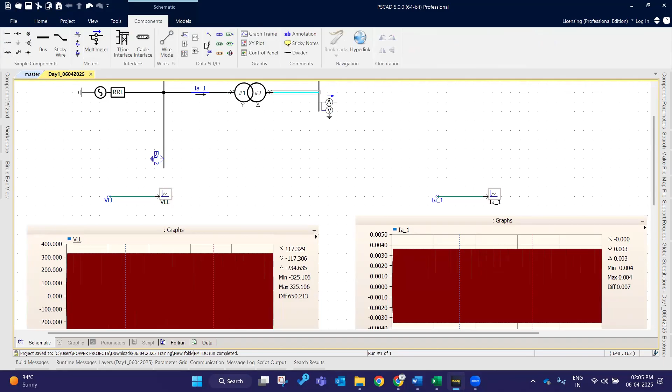So now we can start with the general equipment modeling procedures. In the components, there are many components. We will be using one by one when we go inside the simulation. If we discuss each and every element now, it will take a bit of time. So we can proceed with whatever we need, whenever we need the component part. At that time, I will explain, and at that time we can proceed with these components' explanation.

The models are nothing but, in case the name of the model will be present, the same as it is present inside the master library, in form of, say, a meter. If you know the name, meaning multimeter is there, you can place here. So instead of selecting from the components tab, you can select from the direct models itself. So source, if you are knowing the model source 3, you can select it.

So this is just a simplified components set, which can act as shortcuts for all the elements. From here also you can copy the components and paste them in our workspace. But for this, you want to know the component's name, element's name, at what name it is present inside the master library.

Like this, wind turbine, this - so everything will be present in the master library. So from the master library, how you are selecting and what is the name given to this - if you know the name, you can select the element directly here.

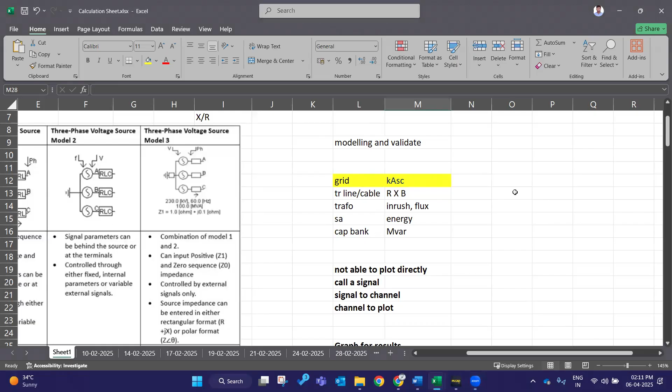This is another document. In this, there are various types of sources in PSCAD, not just one source. For that, we should do some calculations, and after that we will be matching. Before that, let me show the sources that are present in our PSCAD.

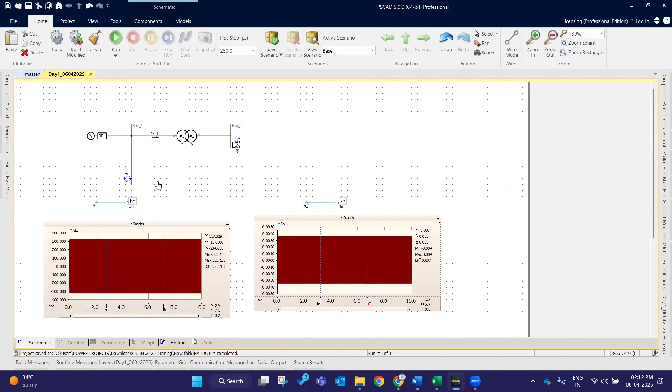There are still some basic options, but that will be resolved when we go with this modeling. See here, I have done some simulations - this is for basic understanding only. After completing the source, we will go with the transformer, transmission line or cable, and load, and we can perform a simple SMIB-like system simulation, and observe what things need to be checked.

Now let me open another case. We had already opened this in the morning itself. So how to open an already created case? If you have created some other cases already and want to open that case with the workspace, there are two things: one, you can directly pull from here and leave it to the software, and the other one is from the file, use this open option.

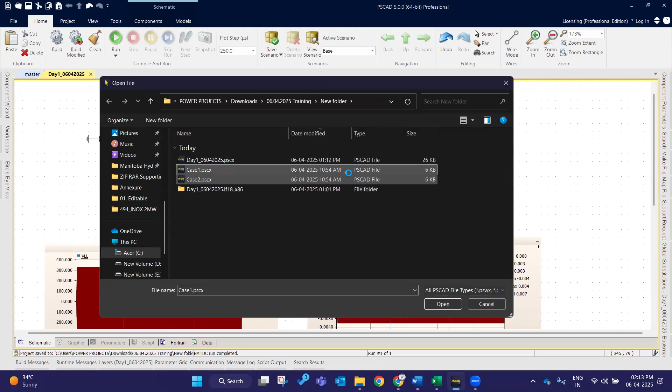So this case was created in the morning at 10:54 a.m., and I'm now opening it, in order to perform a new simulation I'm opening a new case file. Let me enable grid lines, usually it will be convenient for me. So now I want to model a source.

I want to model a source. So in the master library, go to the master library. From this case one, navigate to the master library, and upon selecting, there will be sources - second tab is sources. In this sources tab, our PSCAD says there are totally three number of source models available for AC.

So what is the difference between these three? It is quite similar only, all three are quite similar. Let me explain where it will be getting changed, let me show you. This is the sources tab. In this, this sources model number - if you just click on that, you will be observing three-phase voltage source model type 2.

This is model 2, and this is model 1, and this is model 3. It will not be arranged in order, but their corresponding characteristics will be given here - where it should be used, what parameters to be given as input, what should be taken as output. If you observe precisely, there are only three models, and from this model we can able to extract like this, depending upon the location where we are using our source.

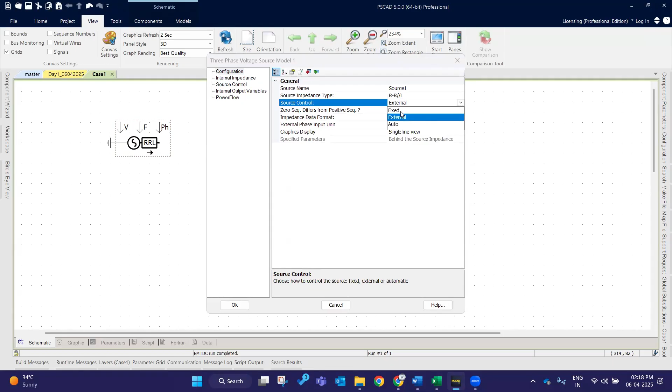For that, specialized tools are there. Let me show next - see, there are various types of sources: only R, source impedance type, R, L, R parallel with L, R series with R parallel with L. So now this configuration is selected, and now it is looking like this. After that, see source control - there are three things: fixed, external, auto. If I give fixed, see now my source, how it is looking - it is looking like this.

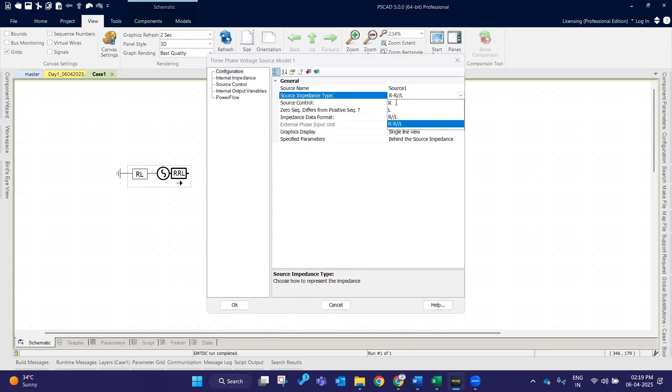So actually there is only one source model. Depending upon the nature, if I want to see how zero sequence differs from positive sequence, I am providing the ground. Now the model which is placed in the master library will appear like this. The same, if it is resistance alone, it will appear like this. See, zero sequence, yes, only resistance. Now check, so this model is shown here, right? So these three are the same.

Using this model itself, we can change the mode of the sources depending upon our requirement. The same for type 2 also. The middle one is type 1, right? This is type 2. If you go inside, it shows model 1, model 2, model 3. So now I have selected model 2. In model 2, the factor is only frequency and voltage alone are the factors to be controlled here. See the impedance, resistance, can be controlled here.

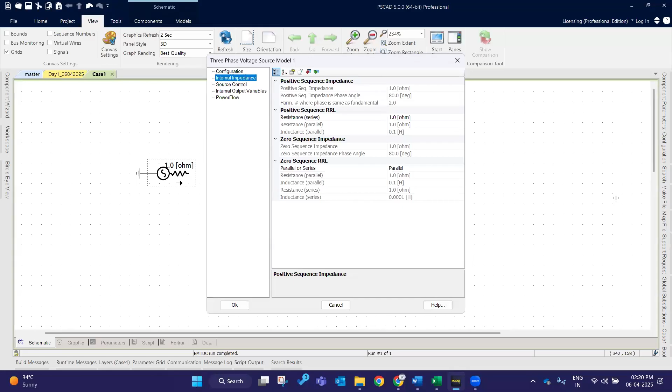Before that, I want to mention one thing. Resistance, internal impedance, see here, only positive sequence R, R-L, zero sequence impedance, zero sequence R-L. So depending upon the element you are selecting, that alone can be enabled here. But usually our impedance is R plus JX, right? So we cannot enter only R when parallel with RL. Sorry, R is series with R parallel with L. So only those configurations can be entered here. See here, R, L, R parallel with L, R series with R parallel with L. For these alone you can enter the impedance, not for the Z equal to R plus JX format, that we cannot enter.

Here also the same. See the configuration, resistive, RRLC, RLC. So if you are selecting, depending upon that, this factor will change, RLC. The mode which we are selecting, for that our source will act. Clear? Usually these two types of sources we won't use. Instead, we will always use, even in real-time case studies also,

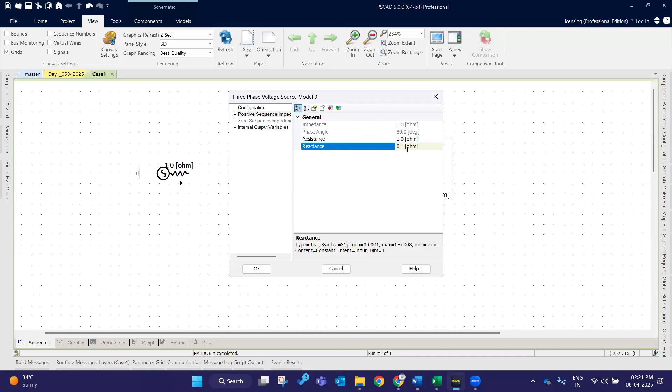we will be using this type 3 only. What is the specialized feature in type 3? Without being like type 1 and type 2, model 1 and model 2, here upon going inside you can enter the positive sequence impedance, resistance and reactance, even in rectangular form or polar form, you can enter in both forms here. The same for zero sequence. Zero sequence here differs from positive. Yes, see here. So this is the specialized feature making us use this model 3 source under every case.

Clear? So now let me clear these two. Just delete. So this source I'm going to use. Before that, one comparison is there, let me show you. So three-phase view also there. This is actually single-phase view. See here, graphics displays there, no? If I select a three-phase view, for each and every phase we can connect the same source. So now let me give a single line. Let us see the comparison first.

So these are different representations. So distinct features, if you want to check, this is model 1, model 2, model 3. Can input zero sequence impedance, automatic voltage and power control. Signal parameters can be behind the source or at the terminals, controlled through either fixed internal parameters or variable external signals. Whereas model 2 is signal parameters can be behind the source or at the terminals, controlled through the same only.

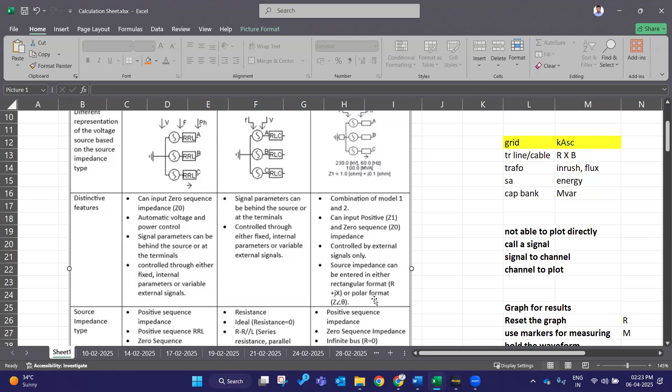When coming to model 3, it is the combination of model 1 and 2. Model 1 and 2 can input positive and zero sequence impedance, controlled by external signals only. Source impedance can be entered in rectangular or polar form, in other sources it cannot be entered. Here it is positive sequence impedance alone, RRL, zero sequence impedance alone, RRL, or else just R, L. So individual elements capability only in these sources you can enter.

But here, even if it is an infinite bus also, we can enter the positive and zero sequence impedance here. Clear? Here the external controls, as I mentioned before, type 1, voltage, frequency and phase angle can be controlled. Type 2, voltage and frequency alone can be controlled. Whereas in type 3 only, voltage and phase angle can be controlled. Clear? So this comparison, let me paste in our sheet for your reference.

Or else another thing, source alone, let me create a separate sheet.

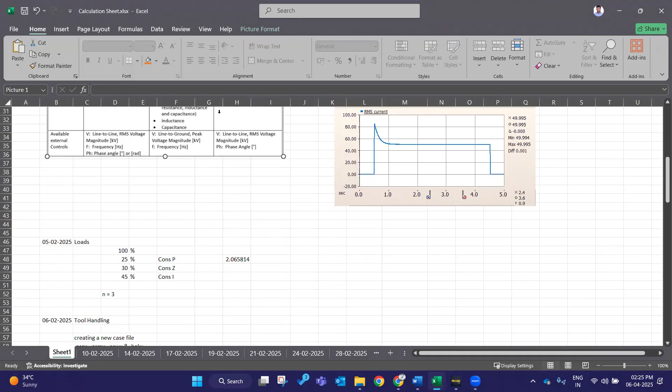So this tab is for completely source modeling. I will upload this book also. Clear? So other than this won't hold any data, right? This one we are going to see the calculations, everything. This is loads. Okay, let me close this.

So yes, now the source model is selected. Now we want to model this in detail, right? So for modeling this in detail, let me choose some parameters - grid parameters.

Actually, I'm taking this data from a real-time project. If you're having data, you can try by yourself. Upon taking a real-time project, I'm in a situation that I cannot present everything. So I will just mention the values, right?

So first one is voltage. Usually voltage means line to line only. Then frequency. Then three-phase short circuit current. Then single-phase short circuit current. Then X by R three-phase, X by R ratio three-phase. Then for single-phase also, there will be different X by R. More, in rare cases only, it will be similar.

So voltages, it is actually a 230 kV system and my frequency is 50. In here, my both the short circuit current, single phase and three phase, are the same. The X by R ratio for three phase is 72.82, whereas for single phase is 54.93. Clear? So this is kV.

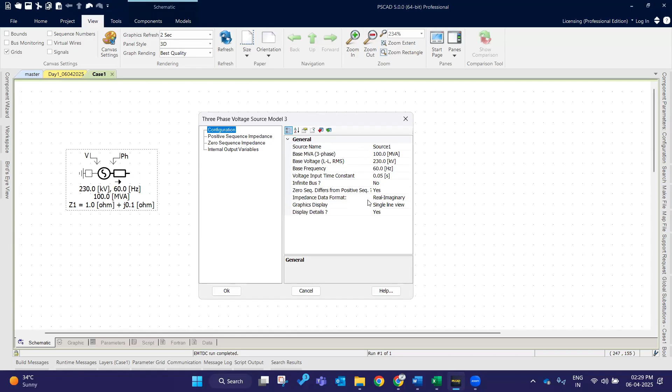Clear? So now let me explore this source. I hope you understand why we are going with model number 3. Why? Because it only permits the entering of positive and zero sequence impedance.

So first the source name. My source name, let it be by default source one. So base MVA, usually it will be 100 only. So let this value also be stored automatically. Base voltage for ours is 230 kV.

Yes, here also 230 kV. Then base frequency is 50 Hertz for us. Then voltage input time constant.

This voltage input time constant means how my source is getting started from the source. For example, when you're starting the simulation, at 0.05 seconds, my source will start to generate voltage. But if you want my source to generate at the first second, even though turning on the source, it should generate voltage at the first second, you can enter here as 1. Actually, this is the default value. We won't change anything; in case if your requirement needs it, you can enter it.

So here infinite bus, upon selecting the option for infinite bus means it will be acting like an ideal source, where see, this positive and zero sequence gets automatically disabled here, right? Upon selecting no, it is getting enabled here. So this is for simulating the infinite bus option.

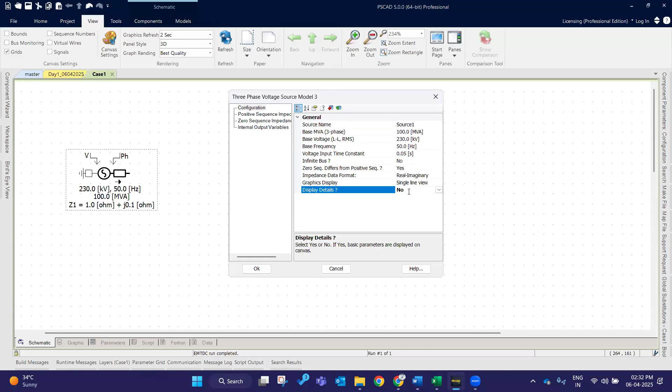Then display details. This display details option is customized and will be available for only very few elements in PSCAD. Other than that, this option won't be enabled for all elements. Now let me select no here, see how it gets changed. All the display got disappeared. If I want the details, I just enable it here, display details, now it will display.

The positive sequence alone will get displayed. Even if you enter zero sequence also, it will display only positive sequence: KV, Hertz, MVA, and the sequence. So this is the first tab what you should configure.

In the second tab, see here, positive sequence impedance, resistance and reactance in terms of ohm, because we selected real and imaginary. The same for zero sequence also, resistance and reactance in terms of ohm, the same real and imaginary we selected.

Then internal output variables is nothing but for defining signals. If you want to measure the output power, you can define the signal here. From the signal, you can follow the previous session's process: signal, defining signal, calling channel, simulating, and taking the results. Like this, for entering the output variables alone, there is a separate tab. Usually all the elements will have the same feature, for taking the output, entering the output parameters alone, there will be a separate tab.

So, hope how to configure this is clear. We haven't entered the values yet, up to now, I just explained this model. Similarly, for whatever model you are using in PSCAD, all the elements will be having, as I mentioned before, two halves, left half and right half.

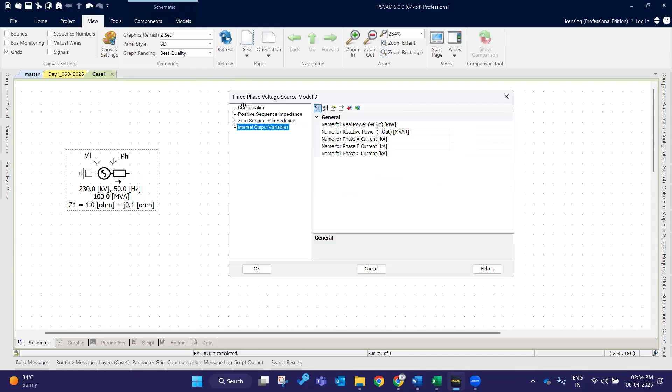So is there any doubt? Shall we proceed with the data, do the calculation, and model the source? Yes. Okay, so up to now, this is the data what we have got from the client.

So after that, we want to calculate the MVA, short circuit MVA. Why? Because after calculating the MVA only, we can able to calculate the positive sequence and zero sequence impedance. For PSCAD functioning, positive and zero sequence alone is enough, negative sequence is not required.

So automation will automatically be considering that. Negative sequence means what, whether the positive and negative sequence, whether it is going to change, it is not going to change actually. Only the sign of the value will be getting changed due to clockwise and anti-clockwise. So here, entering the positive and zero sequence alone is enough.

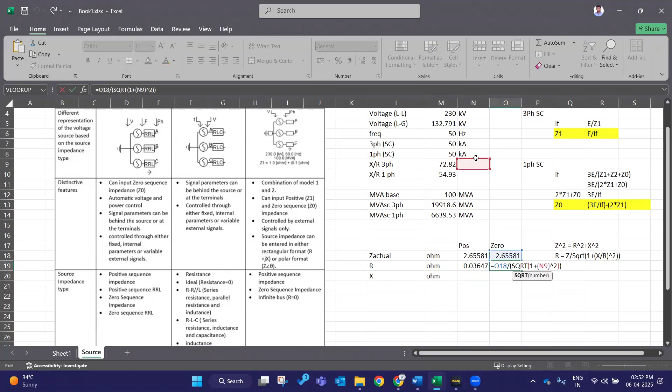But in this case, sorry, for instead of zero sequence, the procedure is the same. But what we will be using is X by R for single phase, right? The remaining, the Z naught will be the same, right? Why? Because in this case, it is Z1. When coming to zero sequence, it will be Z naught.

Then for X, the same formula we can use, the above formula, Z square equal to R square plus X square. So from that, if I want X square means, yeah sorry, X means equal to square root of X means in terms of positive, Z square minus R square.

Clear? The same for zero sequence also, Z square minus R square. So here the value is looking quite similar. Why? Because in our terms, it is both the three phase and single phase are the same, right? So this formula also we are using. So now what are the values that we can able to enter in our PSCAD, these two only.

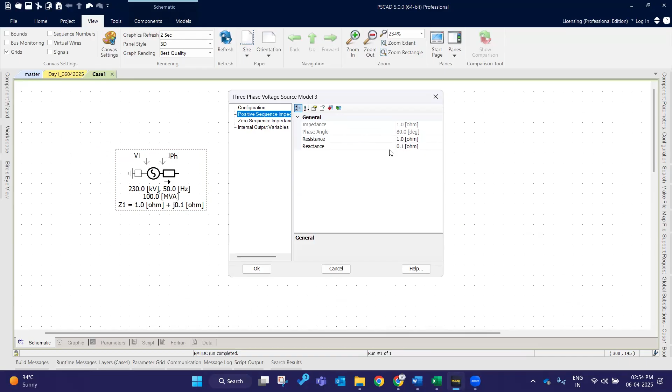This R and X values alone we can able to enter here. Let me show how to enter that. So just go inside our source. Already everything is modified here, right? Base frequency, everything. So positive sequence impedance, let me go to positive sequence impedance, resistance, and reactance. So positive sequence resistance is 0.03647.

Just copy, right? And just copy and paste here. Control C, Control V. The same for reactance. Control C, Control V. So this is for positive sequence. And for my zero sequence, you should calculate this. Sorry, you should enter this.

In terms of ohm only, we are entering. If you know, I want in a polar form only, magnitude and angle only I'm going to enter means, surely you can enter. So before that, you want to do one thing. In the configuration, you want to change here. The impedance data format, no? You want to change as magnitude and angle. Clear? So now entered all the values, just press OK.

So now values will be appearing like this. Usually positive sequence alone will be shown in detail. Zero sequence won't be observed outside this source. Clear? So now we have modeled the source, right? We have modeled the source. What we should do is we should validate, as I mentioned, no?

So elements, everything we are modeling, we should validate it. Validation means, they are mentioning that three-phase short circuit is 50 kiloampere and single phase short circuit is also 50 kiloampere. So for the same grid, I'm going to inject a three-phase fault and a single phase fault.

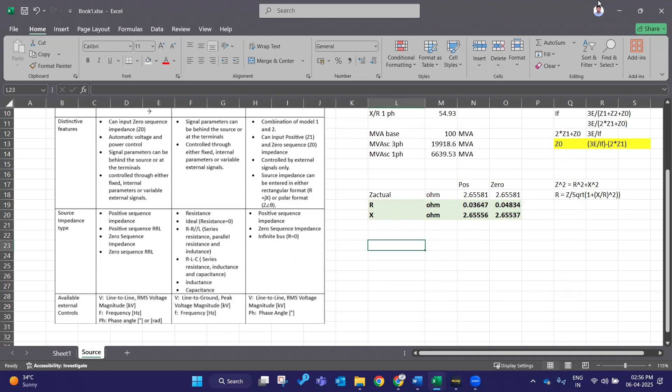So this third type of source, see here, this voltage and phase angle is remaining open. It should not be like this. So in order to provide value to these inputs, there is a specialized option called, in the components tab, data input or output, this channel like integer constant will appear here. Using this, you can place it, just rotate and place here. And similarly another one, rotate and place here. By default it will be holding the value of 1.

So now whatever voltage value you enter here, that alone will be considered by our PSCAD. Even if you enter 230 kV inside this value, so if you enter 230, this 230 will be considered. For example, if you enter 400, 400 kV will be considered. So in this we will be able to change the voltage.

So let me give 230. Phase angle, let me assume there is no phase difference, so let phase angle be 0. Let the phase angle be 0. So after this, this is the complete model of modeling a source. So now our modeling of source is completed.

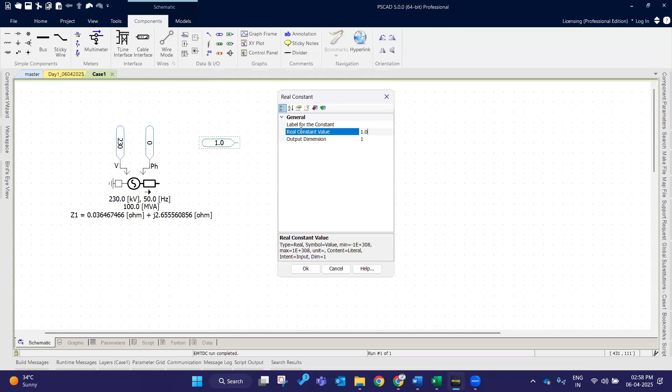Clear? So after that, I will be connecting the source to one bus. Let me rotate - by default it will be in horizontal position, so you should make it vertical by rotating. Let me connect this source with the bus using wire mode. Clear? So now I want to measure everything - voltage and current. Let me use the multimeter in this bus.

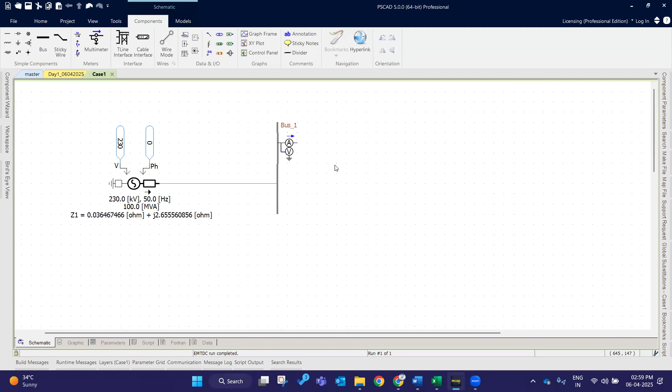So after that, everything is ready. Now what we are going to perform? Three-phase fault and single-phase fault we want to perform, right? So for that, a separate component is there in our master library. Let me go to master library.

See, fifth block, breakers and faults is there now. Breakers and faults, so go inside this. See here, there are various components. So as of now, let me pick this alone - timed fault logic is there now. So you should just copy, Control C, select this timed fault logic. Actually, let me copy and paste and explain.

See, actually it is looking like a single component, but itself it is two components. This is a separate component, and this is a separate component. This timed fault logic is separate, whereas this three-phase fault component is separate. But this will work along with this timed fault logic only. So using this component in our PSCAD, we can generate the faults. Let me connect this with our bus bar. Clear?

So how to configure this now? We have just copied and selected here. How to make it as a three-phase - so first, before that, for two components I mentioned. So first let us explore component one. On the left-hand side, there are totally 5. On the right-hand side, let us see the characteristics parameter. Configuration, we are not going to change anything here, because fault resistance by default will be a smaller value only. Fault type.

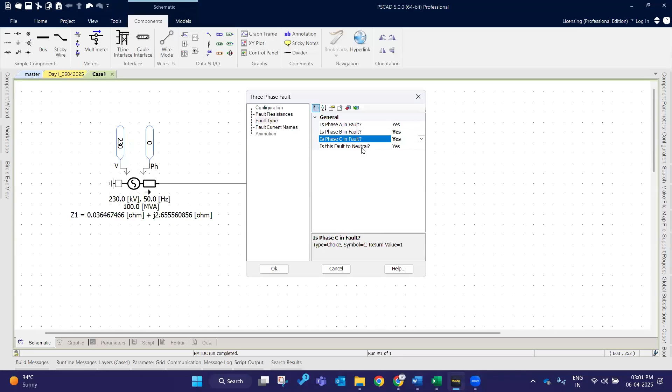Is the fault to neutral? No, why? Because it's a three-phase fault. Now see that A to G has changed to ABC, which means three-phase fault. So now this component will exhibit the three-phase fault to this bus.

So this timed fault logic, what will it do? At what time should I apply the fault and at what duration should my fault get cleared? Let me apply my fault at 1.5 seconds and my duration of fault is 2 seconds. So it will apply the fault at 1.5 seconds for a duration of 2 seconds, after which you can assume the fault got cleared.

Okay, so now let me run and check whether the simulation is converging or not. Sorry, for this we want to use the build option. I directly performed the run. Yes, it is running. Yes, my simulation completed actually.

But we haven't mentioned or defined the signal, or called the signal, or any channel or plot, so we haven't captured anything. Now it is holding the value but we cannot display it. So before running, we want to place the corresponding signals, channels, graphs, everything. So up to now, is there any doubt?

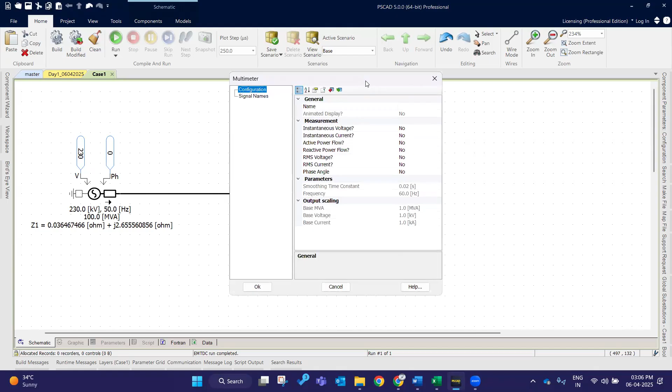Right, so now after modeling this, we want to define signals and we want to measure. So let me use this multimeter. What are the things I want to measure? A voltage I want to measure, of course yes. Then current, RMS current here we are going to measure, because the values we are measuring are RMS. If needed you can measure RMS voltage also, but it's not required. RMS current alone is enough for us.

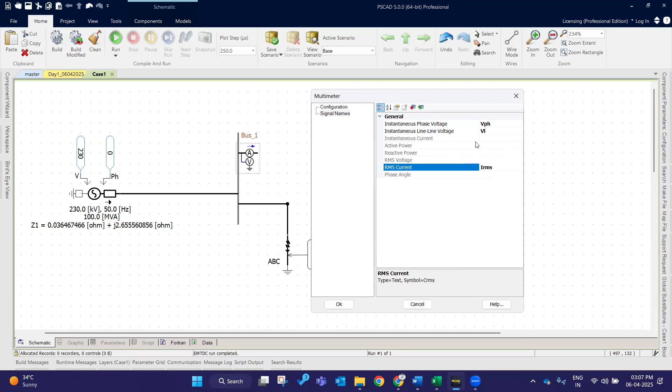In this, select digital always, because analog means there will be some disturbances. Upon enabling, select digital, there will be a drop down here. Select digital, instantaneous voltage, now specify the signal name, instantaneous phase voltage. I don't need line to line. Okay, we can select both the voltages, V phase, V line, so both of them I'm selecting. Then instantaneous current, that is not required for us, so IRMS, let me give the name IRMS. V phase, VL, IRMS, three signals I have defined.

So from the components tab, using this component, in the previous session itself I have mentioned, right? Three signals we want to measure, V phase, phase voltage, and V line. These are case sensitive, so usually copy and paste. After that, use the channels.

Yes, then using the wire mode, now we can able to observe the bus phase voltage, bus line voltage, and the RMS current.

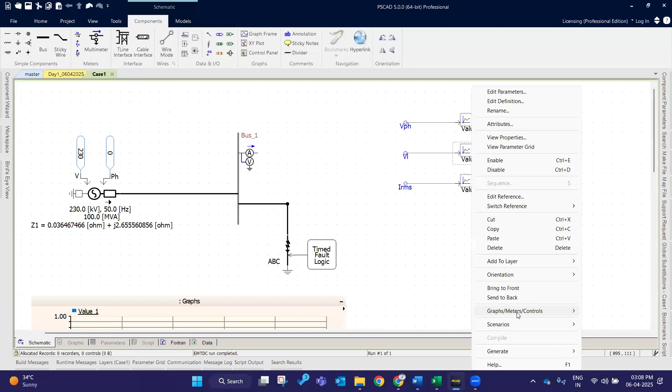Right before that, I want to pick the graph. So in the channel option, right click on that. Using these graphs, meters, and control, add overlay graph with signal option.

So now my workspace has got a little bit congested, right? Upon plotting three graphs, it is looking congested. So at that time, go to view, size, you can increase the size. This is the case I mentioned where you can change the canvas settings whenever you need.

Now our simulation space got bigger. Now let me run the simulation. Yes, it is performing. Yes, run completed.

So run, let me check. Run completed. Let me reset first. First of all, I should reset. Yes, it is not appearing. Let me show you why.

So before that, this build messages is another important thing, where you can observe the warnings, messages, errors, right? Only in this build messages alone. Runtime messages is another option, but runtime messages will show the errors which cannot be displayed by the build messages. Only runtime error, build messages can display the error messages.

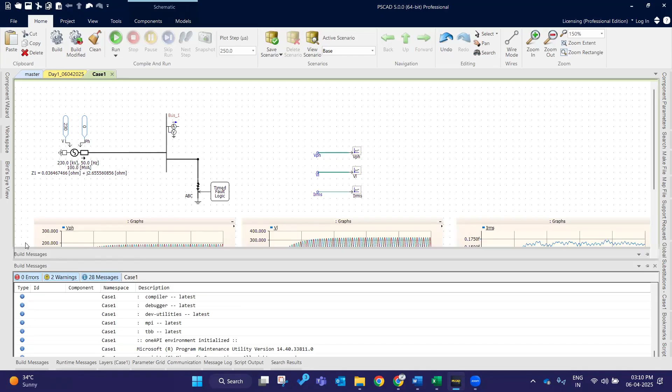So as of now, zero errors in my system, so now my system is perfectly working. Then warnings we can omit.

And the messages is nothing but the beginning of the compiling, so started compiling, executing, sentences like that only. So error only we should mainly focus. Here they are giving the provisions for selecting the error alone.

If you want to check the warnings alone, you can select that, disabling these two. Or if I want to check the messages alone, you can check that. Usually you should check the errors alone. What are the errors? Warnings and messages, no need. Clear? So now my system is clear.

But I haven't got any responses right here. See, so what should I do? First, check with the fault duration.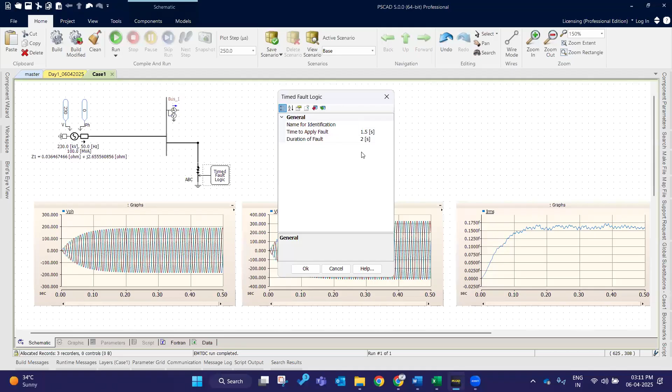So I'm applying my fault at 1.5. My duration of fault is 2. So totally 1.5 plus 2 is 3.5. So at least I should run my simulation for 5 seconds.

But let me check with the project duration. See the duration, it is in default setting, it is 0.5 seconds. So let me increase the duration of run up to 5 seconds. I hope you understood what mistake we have done.

Sorry, what mistake I done. So actually total running time it is set as duration 0.5, whereas I'm simulating the fault at my 1.5 second only. But PSCAD will run for this 0.5 second. What are the parameters you are giving in duration of run, for that second only it will run. Beyond that, it won't converge. So that's why the fault is not occurring.

So now I have changed it to 5 and now running the simulation. Now surely it will run. Yes, now it is completed. Now let me reset.

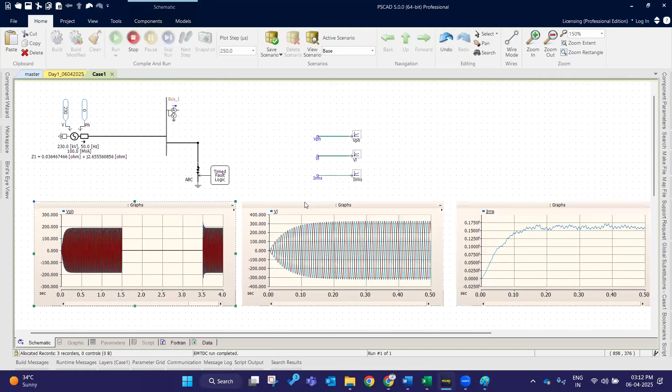Yes, hope it is visible, right? So at my 1.5 seconds, I'm injecting the fault. Three-phase fault I'm injecting, so all my three phases are lying at zero. This is phase voltage and this is my line voltage.

See here, this also during the fault, all my three phase voltages are at zero. Then after the fault, it is coming back to its normal. Clear. So see my IRMS.

IRMS, what should I measure? Actually, I should measure 50 kiloampere. Why? Because I'm injecting a three-phase fault, so totally 50 kiloampere I should measure, because short circuit kiloampere is 50 for me.

But here, before that, let me measure these two. First reset, after that measuring. So measure after the post fault. It is 187. And here also measure, it is 325. And if you are measuring here, it is quite low.

Why? Let me check. So before that, if you want to give units, click inside this channel. There is an option called unit here. You need not configure anything here, just give kV, and it will show kV here. Similarly for here also. So upon giving like this, our graph will appear like kV.

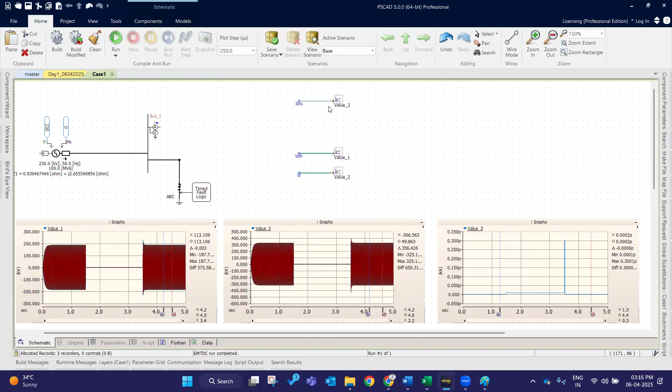So this will permit you to give the instantaneous value only, but all I need is the RMS value, so instantaneous value I don't need. For plotting the RMS value, there is a way to derive this - it is actually containing the three phase value, right? Instantaneous means containing all three phases' values. So from this, I want to separate the single phase value using this wire mode and extend this.

There is an option in the components tab itself - see, array tab, that one option is there. It is appearing like a pin-like structure. This is called array tab. What this array tab will do is classify - in case there is a three-phase signal, upon entering the number here, it will classify the R phase signal alone. For that, after that, we want to use some RMS block.

So for the RMS block, go to master library. In this, there's a meters option - 13th option, meter will be there. Go inside, so there will be a meter called a single phase RMS meter. Let me copy this, copy and paste and connect here.

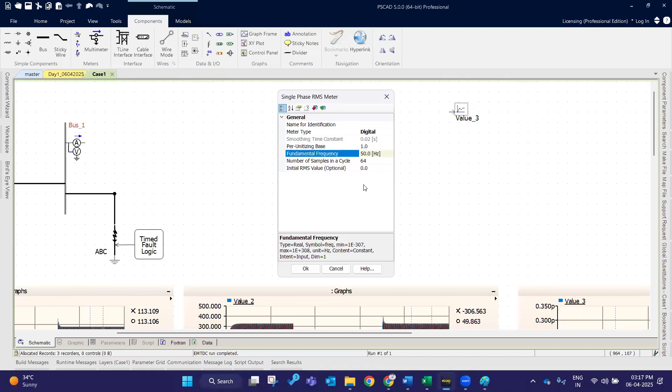So now in array tab you need not configure anything, just go inside the RMS. I will always suggest the meter to monitor as a digital one, because that will provide a precise value. Our fundamental frequency is 50, so the only thing to be configured is meter type digital, fundamental frequency 50.

Right now, place this graph value. Now perform the simulation. Let me wait for the simulation to converge. Let me reset.

Yes, it is not showing. Or else let me check the 1.52 - remaining everything is correct. Three phase fault only, we are injecting. Let me check for single phase fault - it must show response now.

Digital 50 only. Just give me a second. So it is refreshing - so here it is single phase fault. Okay, or else, yes, yes, I understand.

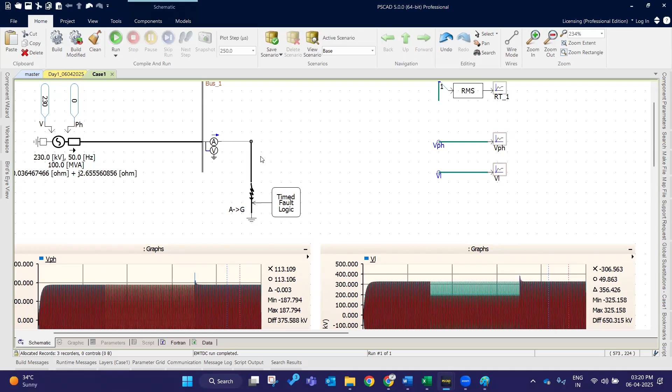Yes, we want to plot the multimeter in - sorry, this is the mistake. Yes, now let me check. Yes, now it is, we are getting it.

So see here. Now, okay, let me come with the three phase fault itself. Now let me run the three phase fault. What I should observe is - I think the system is getting slow here. So for three phase fault I'm injecting, I should observe 50 kiloampere RMS, right?

So now it is running and completed. Let us check R. Yes. Now check after reaching the steady state after the fault - it is similar, right? 50.001 kiloampere.

So in case if you are feeling that this graph is appearing very light, in this option you can select the name of the graph. There will be A - A means at what value currently it is showing. So if this value 2 is selected, corresponding to 2 means R, Y, B - so Y's value is showing here. And if you select 1, R value is showing here. Then V means visibility - if you disable all these three, none of the graphs will be visible. So this is R phase, this is Y, and this is B.

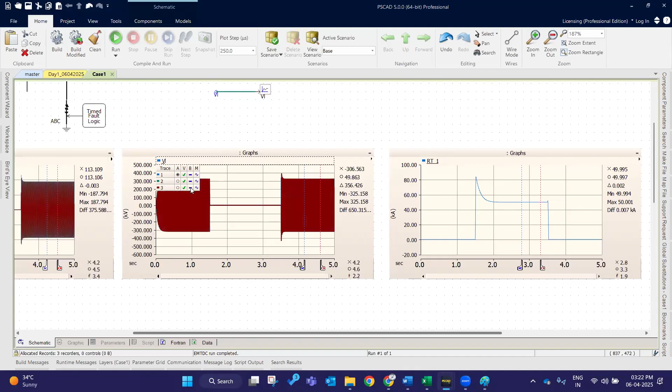Individually you can make them visible, or else cumulatively you can view them. Then B means making it bold - bold means it can appear a little bit thicker than the previous case. Then M means in case if we are applying any stepwise waveforms other than sine, that stepwise waveform can be viewed in detail using M.

So here, let me make it bold. Here it is having all three signals, right - R, Y, B. Whereas here I am measuring only my RMS alone, so R phase RMS alone. Now let me make it thicker - see, 50.001 kiloampere it is showing.

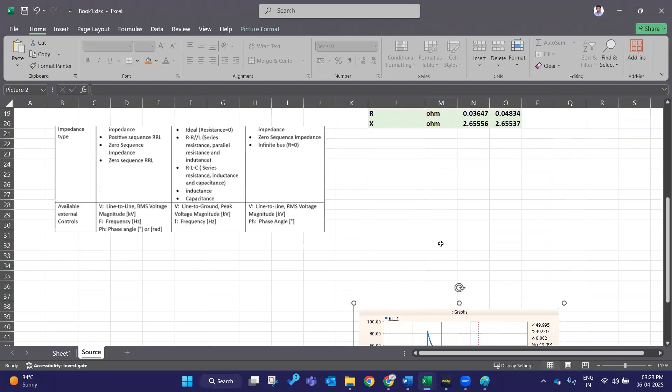So how to copy this graph and paste it - just click on the graph, right click, copy frame will be there. So copy frame and you can paste it in your workspace or in your Excel sheet workbook, whatever you are performing. And this calculation, let me paste here.

So 50 kiloampere I am observing, and the remaining two also I want to capture now. Control C, Control V. Direct Control C and Control V also will work here. 325, I'm getting 325. Then for phase, I'm measuring.

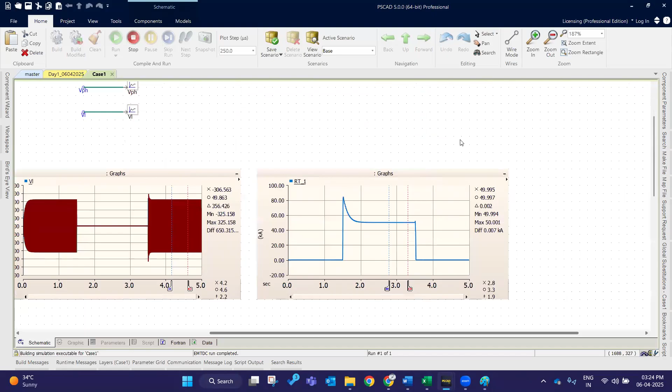Yes, after, see, now it is visible, right? Only one phase alone got faulted here, that is R phase alone. You can view this in detail. See, the blue one is R, the red and green is Y and B, whereas the blue is in zero after the fault. So it is single phase. Here also, now my value is clear.

This is for three phase, this is for single phase. So now these two are got validated.

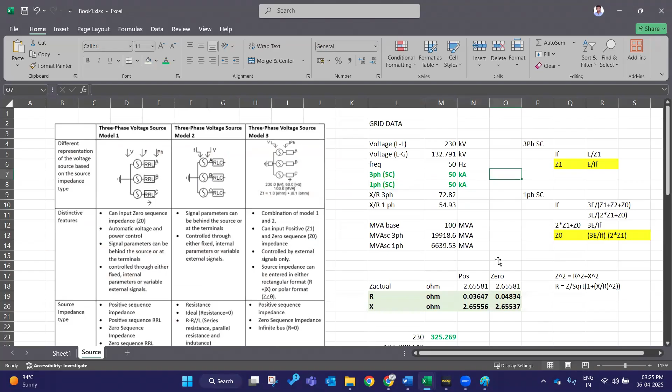So this is how we should start with source modeling and validation.

Sometimes you can ask, in multimeter, this RMS option sometimes won't work. So this RMS current alone, remaining RMS voltage will work, right? RMS current sometimes it won't work, so first use the instantaneous.

With the help of this instantaneous, using this RMS block and array tab, you can plot like this. For example, if you want to plot for all three signals, using this array tab once again, and the RMS block once again.

And channel must be new. In this case, upon plotting for three phases, you should change this number as 2 so that it will capture the second signal, and here you should change as 3, it will capture the third signal. But for us, one is enough.

Calculating in single phase alone is enough, just for validation purpose alone. Upon doing detailed studies, at that time we will be plotting for three phases also. At that time we can use the previous case.

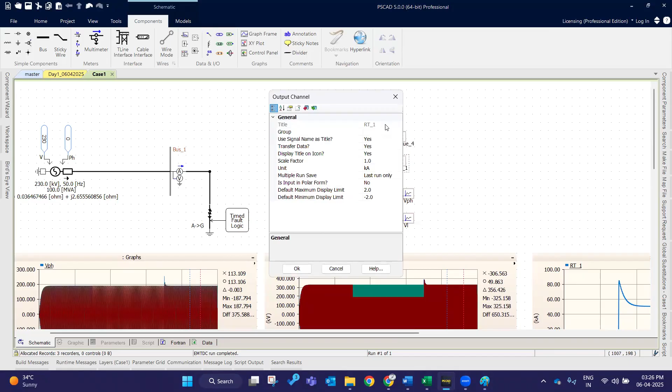So instantaneous current, if you ask whether it is needed, it is not needed actually. But if you want to look, you can put a different channel for this. So now interconnect. Now let's once again run the simulation.

As it is completed, so in this RT1 you can change the name here, IRMS like this.

So this instantaneous, let me observe the graph. After running, if you plot the graph, sometimes it won't occur. So before running itself, you must plot the graph, then you have to check with the graph. Let me run once again. Previously I hadn't taken the graph, actually that's a mistake. So after plotting the graph, you must run once again.

Yes, so instantaneous current is appearing looking like this. All the three phases, it is not showing.

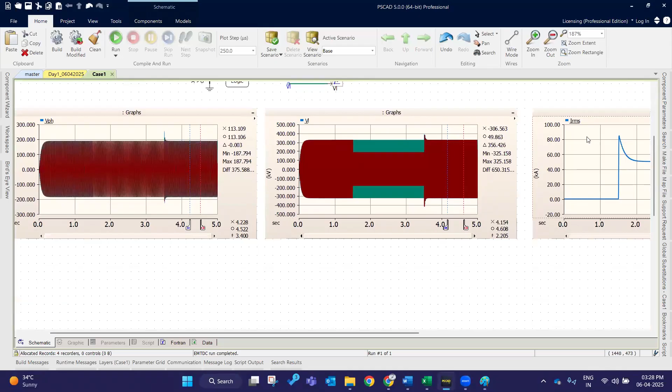Clear, so this is not required actually. If you need, you can plot that also, but these three also not necessary. Simply IRMS alone is the mandatory one. Why? Because we are validating this. This voltage level you might be aware, we are going to get this only.

So now, how to name the grid or anything? Why? Because by default it won't appear. But in other softwares, the element's name will be appearing here itself, like in the bus it is appearing like this. But for grid, multimeter, everything, it is not appearing, right? So for that, in the same components tab, there are two different options for us: one is annotation and the other one is sticky notes.

So annotations means nothing but, so now let me do grid power grid, power grid in the line 2, let me give 230 kV. Now this will be appearing like a text-like thing where you can place it nearer to the grid.

Clear? The sticky notes also the same, where you can type power grid, 230 kV. Clear? It will appear like this. You can adjust the size of sticky notes up to that much you need.

But for us, this is enough. So there are two possibilities. Similarly, you can name all the components like this.

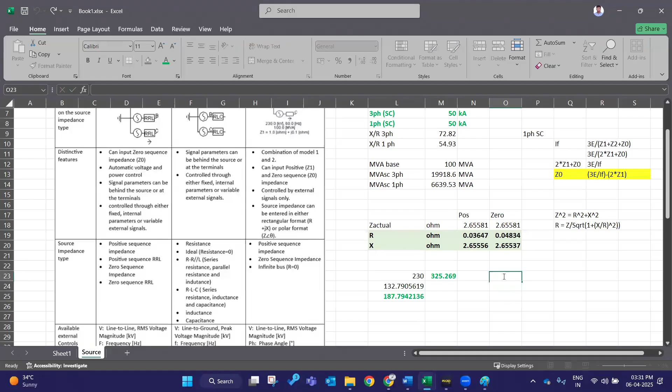Does that mean the peak reached more than 80 kiloampere? So from the diagram you're asking? Yes. Due to the disturbance in our system, it goes beyond the peak value of the short circuit, IP equal to slightly more than 80. But after reaching steady state, only we want to measure. Then only we can check whether our system is capable of supplying the rated short circuit kiloampere.

Yes, there are some other tools also. Some other tools means these tools I mentioned. No, this is channel, and this is a rotary switch. This is slider, this is variable switch. This is push button. Clear?

So what is the difference between these four? This is rotary switch actually. For plotting all these things, you might be aware this is channel, right? Using this channel you will be plotting. That is not required here.

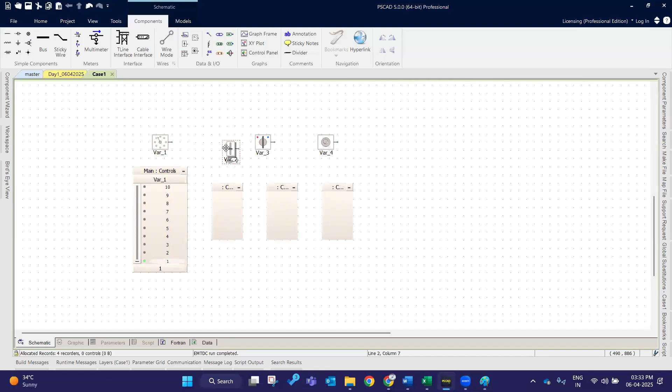So for these four, for example, I'm using this control panel tab. This is actually an empty tab by default. If you want to control this variable, you can use this control panel also. Just press on this, select control, drag and leave, right? Similarly for all the things, you can use this control panel. Clear? Now you can understand the difference, right? So what is the difference between these things?

So now, see the first one is rotary switch actually. Rotary switch means we can fix the position of this switch anywhere. See, 2, 3, 4, 5, 6. For each position, what action to be performed must be set by you. See, position one data. For example, for my position 5, holding 525, anything, it can be a kV or anything, just for reference, or else 400 kV is there. So now I want to supply 400 kV, this position you can adjust like this, up to 5. 5 means here it is showing the value, right? 400. This is rotary switch actually. You can set up to 10 values here.

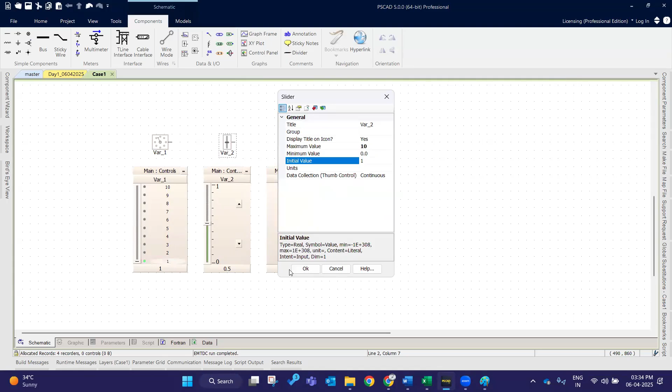Yes, maximum 10 only. Then the second one is slider. Slider means precisely if you want to model, for example, go inside this slider. You can set the maximum and minimum value here. Maximum value, let me give 10. Minimum value, let me give 0. Initial value, let me give 1. Now see, 0 to 10, it will be appearing. You can adjust in a fine manner. For example, if you need 5.5, you can also type 5.5, right? So the difference between this and this, I think you might be clear.

Then this variable, this is known as two-state switch. So it can be either turned on or turned off. If it is off, it will be 0, on means it will be 1. Then this is a push button, right? Upon pushing it once, it will give the value of 1 to the network. So it can be used wherever we need, right? This is also a user defined component only, so we can use it in order to adjust anything.

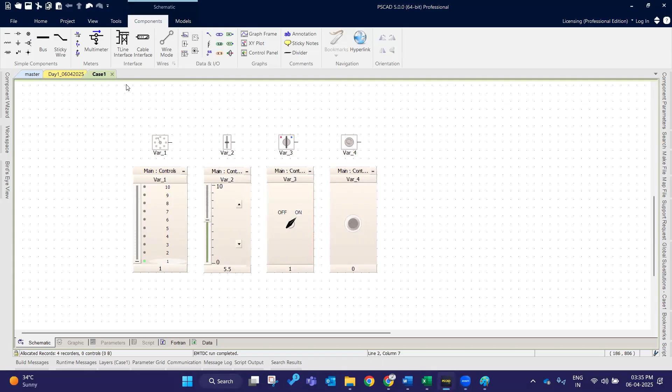So these four are the other tools present here. That scenario I mentioned will be suitable for this. Let me explain. See, this is the first scenario. Let me change some values, 100 to 100. So I haven't connected it with any systems.

So I'm just setting 1000 there. For me, I'm setting here as 700, right? In here it is 5.5. Now I'm turning off the switch and my push button, it will be by default.

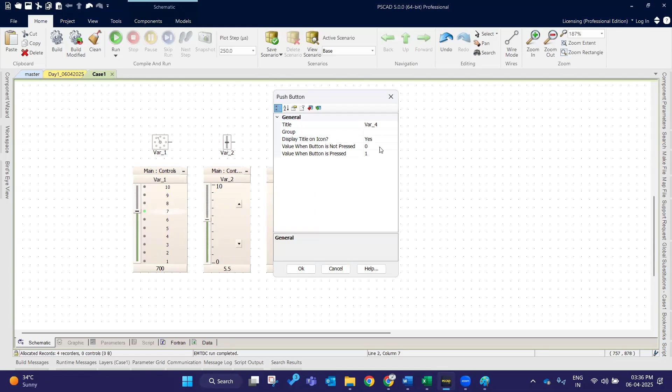See, when the button is pressed, not pressed, it is 0. When the button is pressed, 1. Similarly, we can change. So now let me save this scenario.

Save this scenario first. This action will overwrite the value stored in the active scenario. Proceed with save - so you should not alter the base thing. Just cancel, sorry. First of all, you should select this drop down.

So go with save as. In the save as, just give me case 1. Okay, clear. Now change the values as 600.

So this scenario will be saved, the first scenario will be saved. I had already, some of the scenarios are there. So only case 1, yes. Now let me save the scenario into case 1.

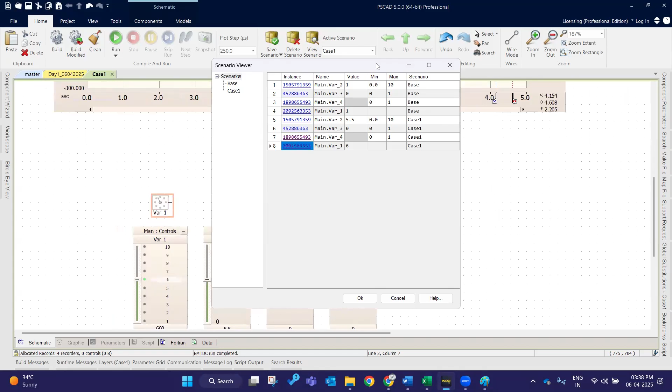So now let me view the scenario, 5.5, 0 to 10 I had given, no? Then 0, 0, this 3, 1. In the variable, I think it might be visible now.

See this case 1, these four are saving our values. So 5.5, here it is saving. 6, position 6, see here, it is saving. And 0 to 1, it is in 0. And this is when pressed, it is 0. So when the push button is not pressed, it is 0. When it is pressed, it is 1.

Okay, now for the same I'm changing the values here. Let me come to 3 and let me go to 7.7. So now let me turn on this and configure here - when the button is not pressed, it is 0, 1, and the button is pressed, it is 0.

Clear? So now let me save this scenario, save as case 2. Case 2, yes. So now in this active scenario, we can check case 1, case 2.

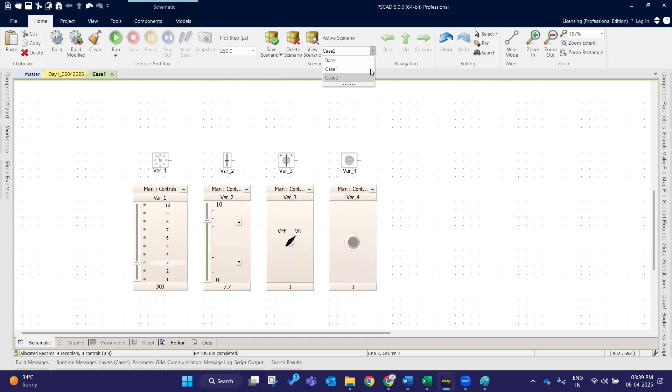Now we have selected 307.711. If you select case 1, your own previous values will occur. See here, 600, 5.5, 0, 1. Whereas in my case 2, 300, 7.711. The base means very basic, the first thing, without altering the base.

If you are using this scenario option, always go without modifying the base. Just click save as and create it as a new case and save so that you can view the cases here. Hope it is clear, right? So in case you are using these specialized components and their values must be changed for each thing, you can create some scenarios like this.

Clear? So let me come to the base first once again. If you view the scenarios, it will be like this. Why? Because we are having four things here. So base also has four, whereas my case one also has four components, case two also has four components. If you don't need any component, you can select here and delete.

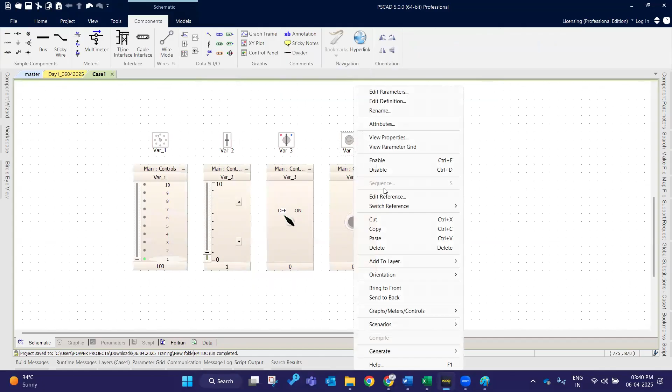Clear? So this is how you should use the scenario. So these components will be used, right? We can see, so for disabling and enabling, just select all those - control D for disable, control E for enable shortcuts. If you want to disable this element individually, just select that element. The same control D means disable. Control E means enable. You can use the shortcuts also.

Yes, is that clear? Logic gates will be used in integrated circuits, ICs. Whenever we are modeling with electronic components, we will be modeling. But for our power system, we will not be using any logic gates. Right? So is there any doubt in this?

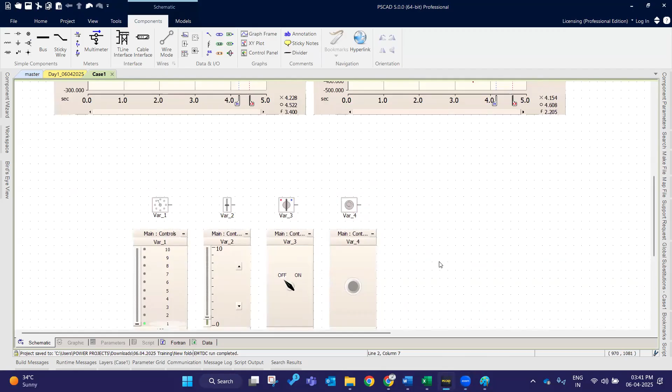Okay, now let us just quickly model. Let me open the another case file also with what I created in the morning. Yes, so this is for our SLD creation. Let me show how to create an SLD.

Right? So we should want to capture the corresponding case results only, like the graph or else in the form of a table. 18 cases I mentioned, no - that is for insulation coordination, not here. In the insulation coordination, when you are performing with TOV, right, temporary overvoltage study, according to the IEC 60071 Part 4 standard, we will be creating all those cases.

But for this basic session, we cannot create all of them - just basic cases only I'm creating here. But there will be logical cases like Ferranti effect separate case, load rejection, LG fault, LLG fault, LG fault with load rejection, LLG fault with load rejection. So like that, there are various cases, right? That will not be included here.

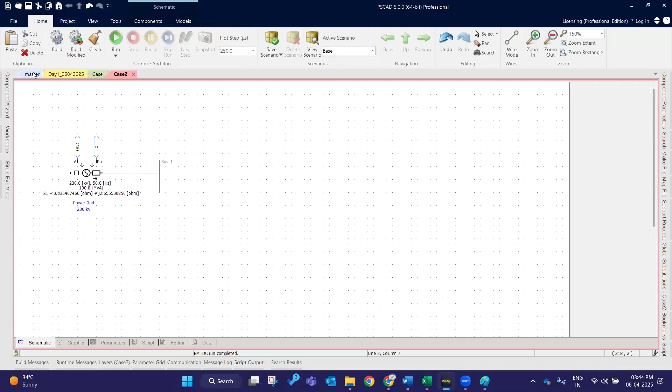So after that, let me connect with the transmission line. For transmission line, let me show you. So when coming to PSCAD...

Scenario creation, view or delete or create scenario. I think you might be aware where to use scenario.

Then when coming to transmission line and cable model, for both transmission line and cable model, there are two approximations here. One is pi section, and the other one is distributed parameter. Let me show that.

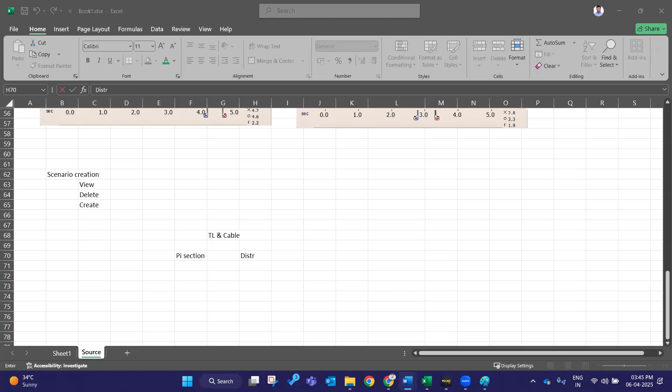Where is the word? Yes, here it is. So this comparison on flowchart will be there, let me show you. Right, so this is for modeling of transmission line and cable.

So here modeling techniques will be classified into two different types. One is pi section and the other one is distributed parameter. In the distributed parameter itself, it can be classified into two: one is single frequency, and the other one is frequency dependent, right? In frequency dependent, it will be classified into further two: one is modal domain and the other one is phase domain.

So in this modeling techniques, we will adapt only two. The first one is this pi section, and the other one is frequency dependent phase domain, right? FD phase model, frequency dependent phase domain model we are mentioning. So other than that, Bergeron model is there.

So these are specialized things in our PSCAD, which will permit you to model the exact transmission line or cable, as it is in the field. Whereas this pi section is the approximate equivalent model, where you can enter only the length and the RXB parameters alone. Other than that, you cannot enter anything, right?

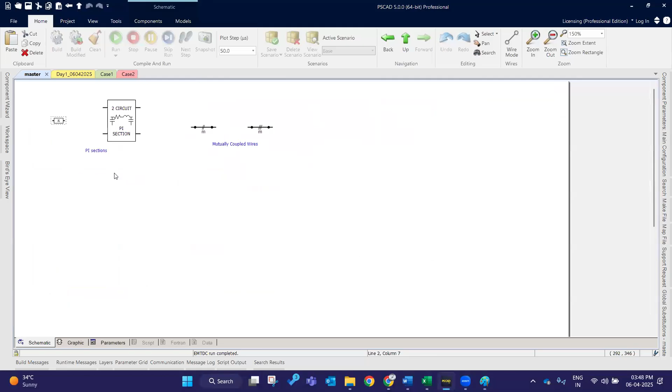So for pi section, for transmission lines here it is. So if you go inside this transmission line, it will take a long time to complete. So now let me go for pi sections. Go inside this, let me copy the first one. This is another one, two circuit pi section. For us, single circuit pi section is enough.

So pi section, let me paste here. Similarly, we can adjust the shape of the appearance here. Go inside this, so it is in compact view, three-phase view, single line view I can give. Right, single line view, it will be appearing like this. If you want compact, you can give like that. So now let me enter the RXB parameters.

This line name is for your reference only. If you want it to appear outside, you want to use the annotation tool. Let me enter RXB. So mostly whenever you are using the transmission line or cable parameters, always go with RXB parameters, which will give you the precise modeling as well as answers. Results also per unit value, RXB per unit value. Coupled, my frequency is 50 Hertz.

Let me enter the line length, as example I'm entering 100 meter. Then RXB, my rated voltage is 230 only, right? So as of now, let me proceed with this default values, why, because my default values is also for 230 kV only. So if you need another bus, go to the components, bus, rotate it.

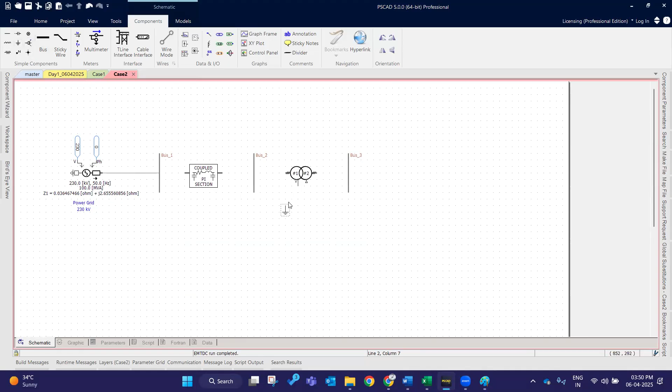Let me consider it as solidly grounded. So from here, you can pick the ground. In the component itself, you can pick the ground and place it in the star. So solidly grounded, 50 hertz, not 60 - sorry, 50 hertz, not 60. 230 by 11 kV, for example I'm giving 230 by 11 kV. So here also transformer display, we can able to display details, right? So after that, let me connect all these things.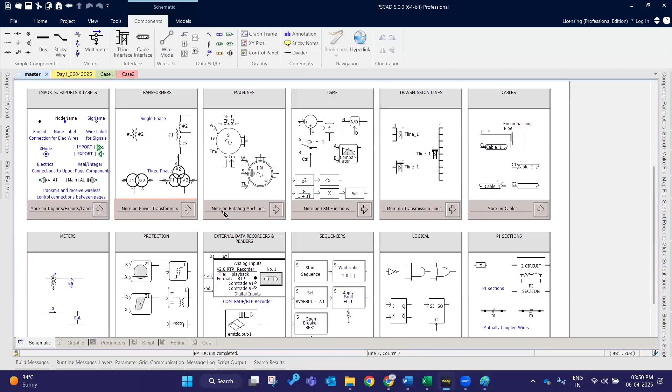So finally, let me connect any loads in order to check. Loads will be available in passive elements. Upon scrolling, see here, single or three-phase loads are there. Let me copy and paste the loads. For both three-phase and single-phase, we are placing this load only. This load has the capability of sensing automatically, so we want to enter the per phase values only, that's the only thing. See the rated voltage, RMS LG, this is 11 kV.

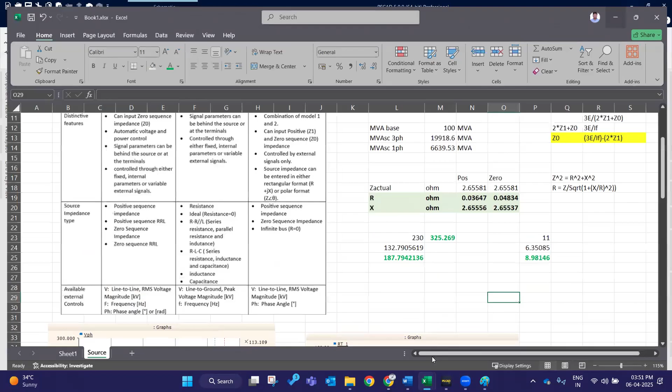So for line to ground RMS, let me enter. The same thing, let me enter. 6.35085, let me copy. Upon entering line to ground RMS, it will automatically sense. Yes, so upon entering like this itself, it will automatically sense as a three phase. So wherever we are connecting, it will act as a three phase, and where we connect it differently, it will act as a single phase.

Now let me run the simulation and try. We haven't plotted anything, we haven't plotted anything. So let me plot the current from here, the same thing. So after that...

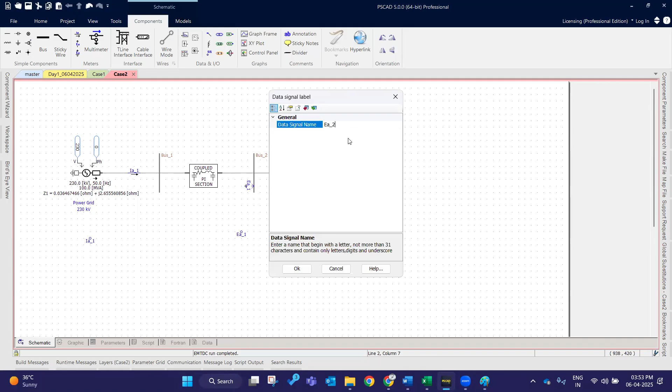Voltage at the two different buses. If you are plotting voltage alone, you can use this component, and the another one. So finally, these three, if I'm measuring, for example I'm taking IA underscore one. First we should define the signal for plotting, then EA underscore one, then the same EA2 - control C and control V, I'm copying the previous signal and just renaming it. So finally, let me choose the channels.

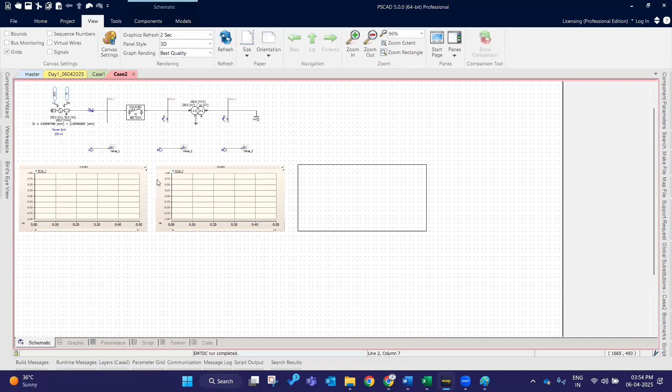Let me plot those channels also. Then after plotting the channels, the next step is to bring the graph. So canvas settings is not enough, so I am changing the canvas from A4 to A3. Clear? This is how you will be developing.

Now let me run the simulation. Before that, we haven't used the build option, right? Now let me use the build. Build is nothing but in case there are any error messages that we need to correct before running, it will show, or else it will show like this: finished compiling with PSCAD version. So upon showing like this, our system is ready to run. If it is not ready to run, it will show what type of error we have in our network.

Yes, it is asking... yes, the simulation completed.

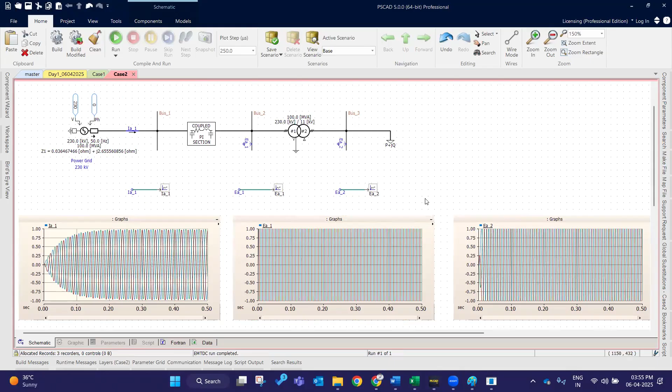Now let me reset all the graphs. We haven't created any events, right? So in the sending, let me also place one voltage so that at least for a current effect, let me explain you the same thing. Instead of EA2, let's give EA3, and plot a graph.

So these graphs you can place anywhere in the network, and it is not mandatory that all the signals and the graphs must be placed near each other. Signals you can place anywhere in the circuit, similarly the graph also. Clear? So now let me run the simulation.

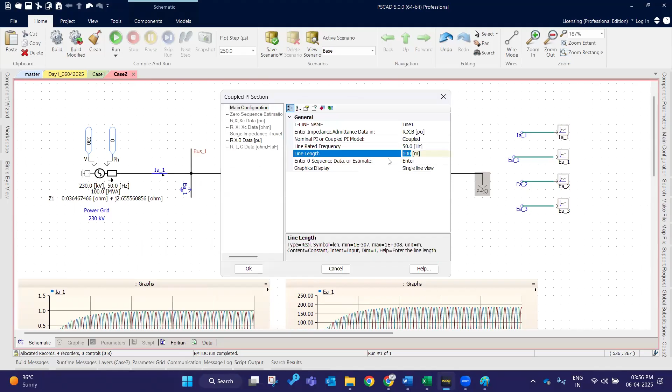So here EA1 is the sending bus, EA3 is the receiving bus. Yes, we are receiving something. So in order to check whether our model system is perfect, let's disconnect the load and increase the length, let's say to 400 kilometers.

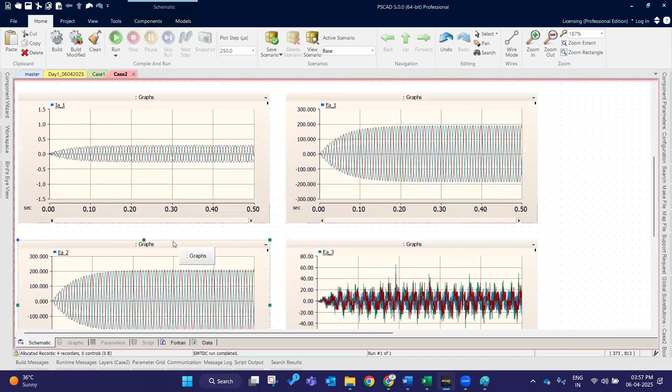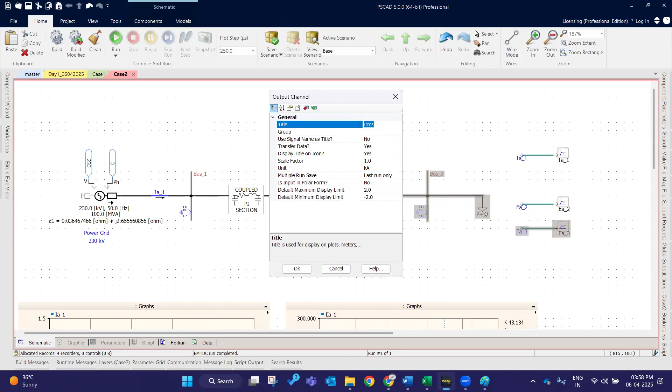So if you want, you can plot for RMS also. So for that, let me bring this RMS... should be same. The same case for receiving, and also let me proceed.

This is the EA2 signal. So before running the same signal, disable the other signals that have the same name, so sending and receiving. This graph is not required for us, because now we are plotting sending and receiving, right? So once again, I'm placing new graphs.

Let me run the simulation and check.

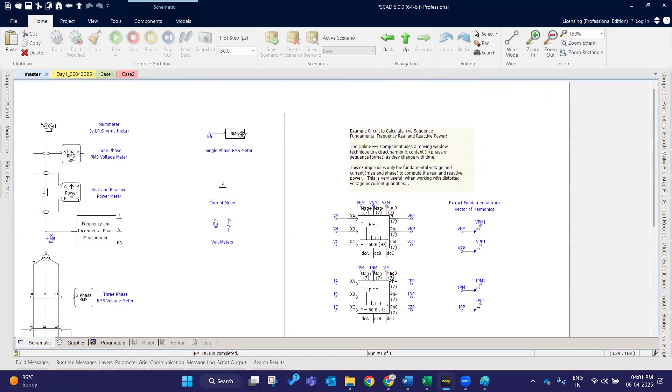So the RMS block, it is observed in, if you go to master, in the meters, the 13th tab at the top, single phase RMS meter. We can find this RMS meter here.

Stray capacitance, usually we will model during our switching and lightning study while performing insulation coordination. For this basic model, we don't want to model the stray capacitance. Usually the transformer will have that stray capacitance, and we will be modeling it for insulation coordination studies. Other than that, remaining elements, stray capacitance will not be present here.

Using the same component I had shown previously, you can able to create all types of fault. So SLG, LLG, triple L, everything you can create here.

Yes, power factor correction capacitors - no, those are capacitor banks, right? That is not equivalent to stray capacitance. Power factor correction capacitance means capacitor banks that will be modeled separately. What Ayush is asking is stray capacitance.

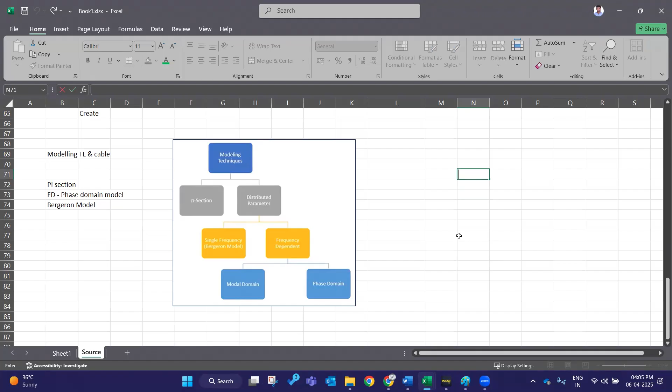What is PSCAD, why PSCAD, everything. I hope you have got some idea regarding how to create a new file and what are the types of files, file classification - .pscx, .pswx, .pslx, everything. Then after that we came across this ribbon control bar. We explained all these elements in the ribbon control bar - how to clean up the model, how to create a scenario. And before lunch, we covered how to plot the graph, how to call a signal, define a signal, how to connect it with the graph, and how to look at the results, everything.

Then finally, we started the source modeling with the data. So with the source, I showed how to model the source and validate it with some calculations, and we validated the same in our PSCAD also. After that, we created a simple SLD network - this is how we should configure everything in PSCAD.